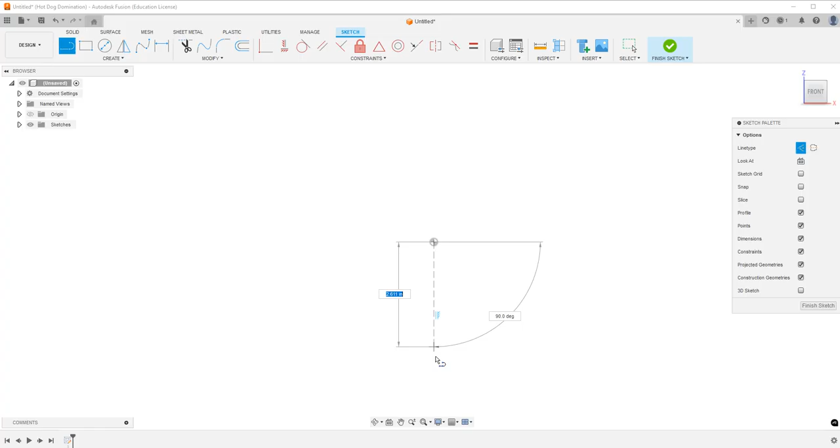First I'm going to hit the Line tool and select Construction Line, and go from the center down probably like 4 inches, because I think that's going to be the length of the bookmark that I want.

Then I'll hit the line tool again and deselect construction. I'm going to go out - let's see, how thick do we want this? 0.5, yeah, that should be fine.

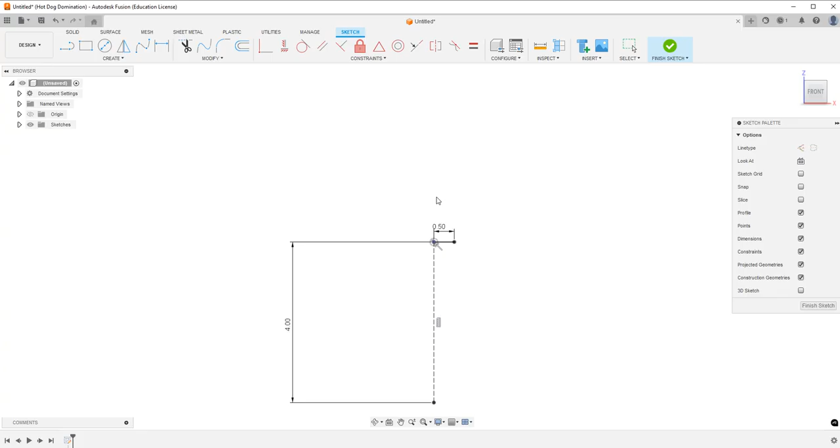Now we will go down to really anywhere, we'll just go 3.5 down, then hit this again and go all the way this way to the center. Now we don't need to do this - we'll go out 0.5, go down 3.5. We could have just as easily done this and then started and put all these dimensions in. So it really doesn't matter the way that you do it.

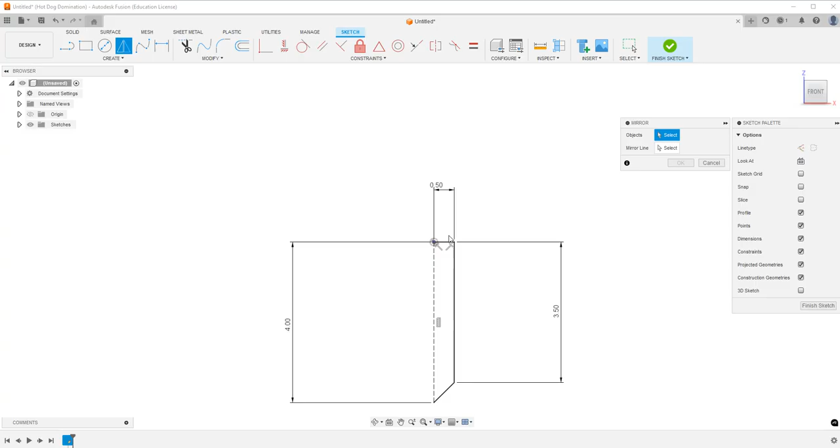Next, I'm going to mirror 1, 2, 3, and mirror it about this line. So now we get a closed sketch.

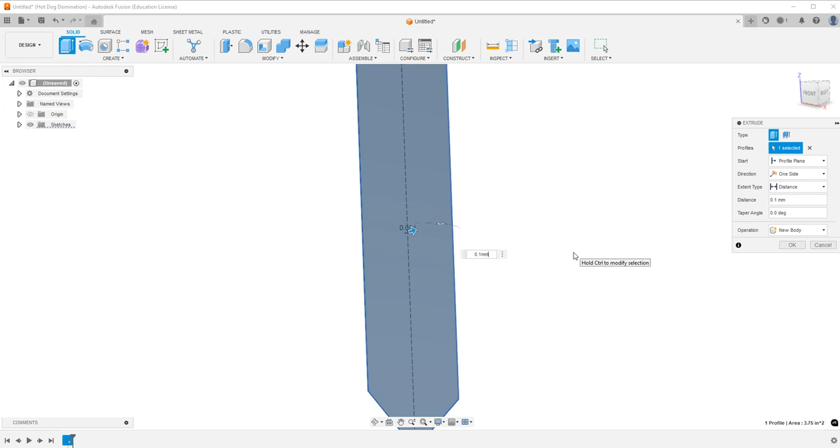At this point, we're going to hit solid, hit extrude, and the extrude direction is kind of important because I want to know which way it's going. We're going to extrude out 0.1 millimeters so that the software Fusion 360 calculates it itself - we don't need to calculate it ourselves. And there we go, it looks very thin, almost like it's as thin as a sheet of paper.

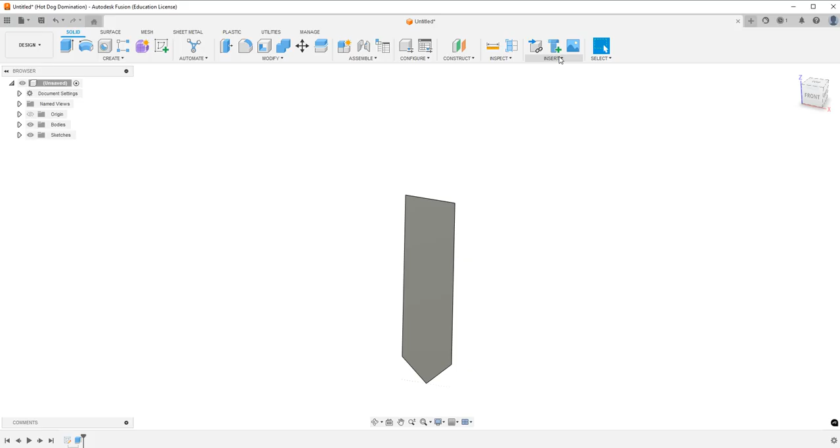Now next we're actually going to input our canvas from this helmet. We're going to go to the Insert tab and hit Canvas, insert from my computer. I'm just going to go to Desktop, and there's this helmet.jpg. I'm going to open that, and we're going to put it on the front plane, and there it is.

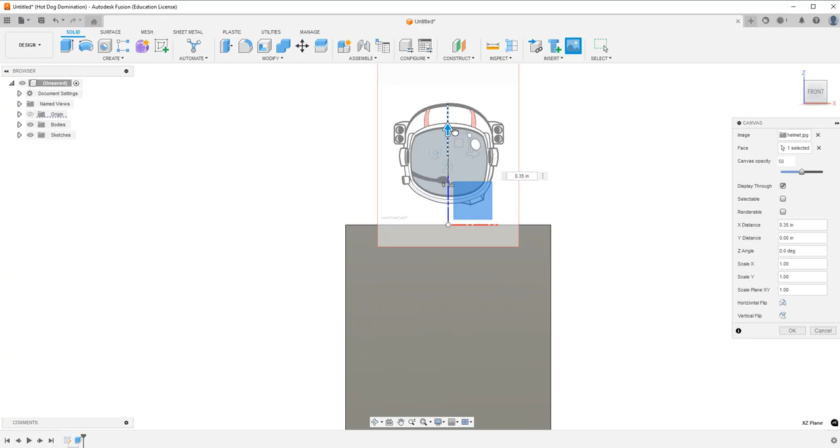First things first, we're going to move it up. There's going to be a little bit of a bar here that it's going to sit on, so we just need to keep that in mind. I'm going to make this just a little bit bigger, move it up.

Maybe 0.35 will be good. Yeah, that's good. So next thing we're going to do is we're going to create a sketch.

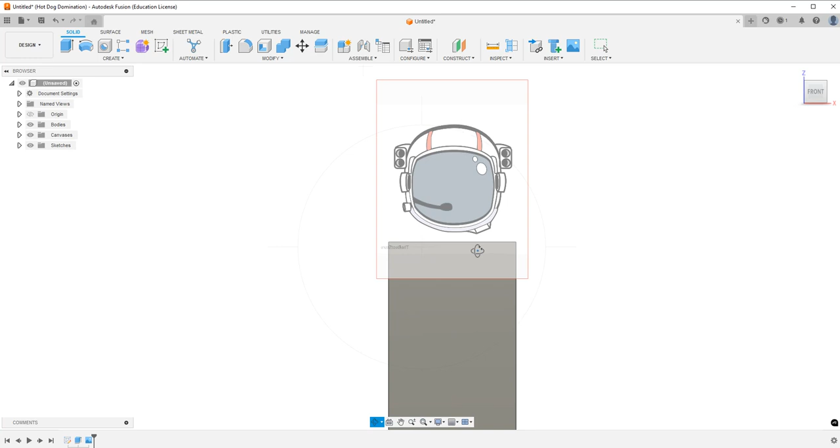The reason it's important where we add this is because when we extrude out this way, we can make the sketch on this front plane. If we extrude out the other way, it wouldn't make much of a difference—we could still extrude on this plane, but then we'd have to work off the opposite side and not this side. So just keep that in mind.

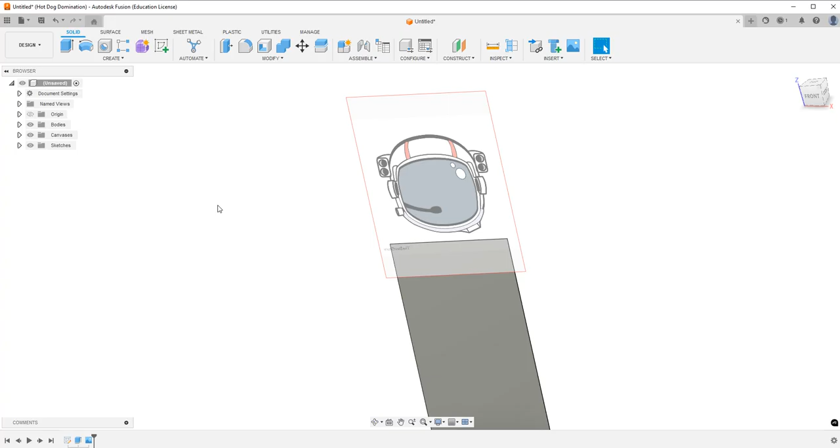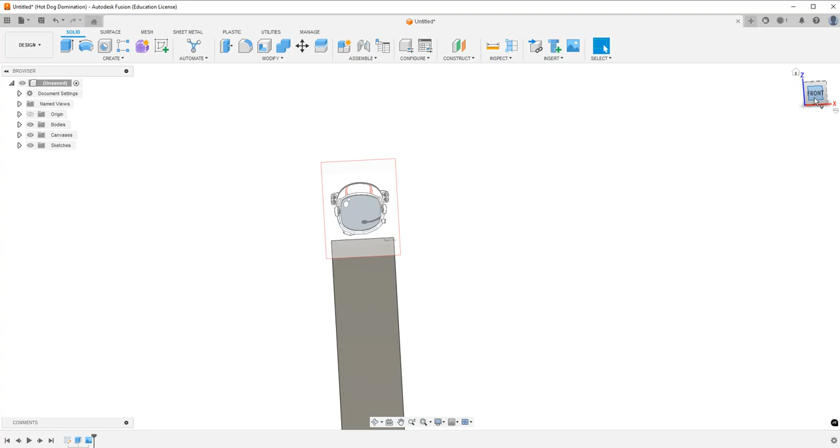Now, I just realized this is backwards actually. So we're going to hit this, and what we're going to do is mirror this—it's just this one right here, the horizontal flip. Realistically it didn't really matter, but in any case, tangent aside.

Now what we're going to do is hit Create Sketch, and we're going to do it on this front plane. First thing I personally want to do is hit Project Include and hit Project, and I want to project this top line, and you'll see why in a second.

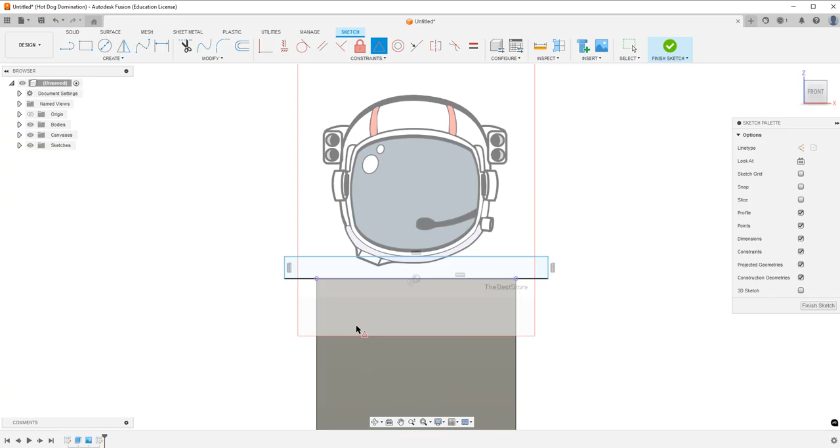The first thing is I'm going to create this 2-point rectangle all the way this way, and I'm going to create the midpoint from here to here. The reason I create this is because when this bookmark rests on the book, I want it to rest on a flat surface. I don't want it to rest on this point because that could actually indent into the pages, and we do not want that.

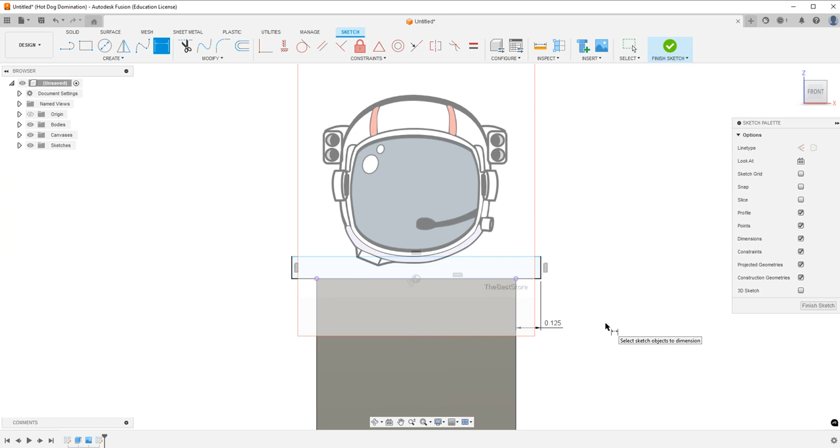Next I want to make this a little shallower, so we'll go 0.125. And then I actually like this height, so we'll leave it probably really close to what it is—0.11, you know, 0.115. I like even numbers.

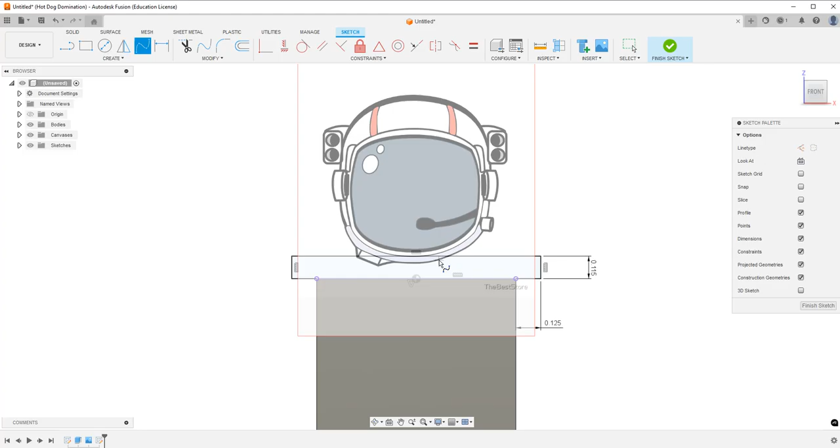It's my little OCD. But now what we're going to do is hit the fit point spline, and we're just going to follow all the contours of this. We'll start with the outside. I guess for this one we just need a line, so we'll go one line up here. And now we're going to go to the fit point spline, and we're just going to start following this contour.

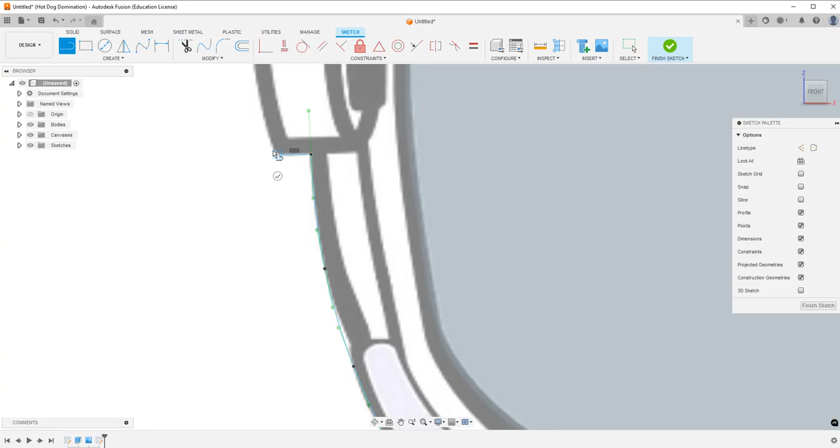I skipped over this little section here. It doesn't really need to be all that exact. It's nice to have things exact, but it's not necessary. With what we're doing, it just really isn't. At the end of the day, it's really not going to matter all that much.

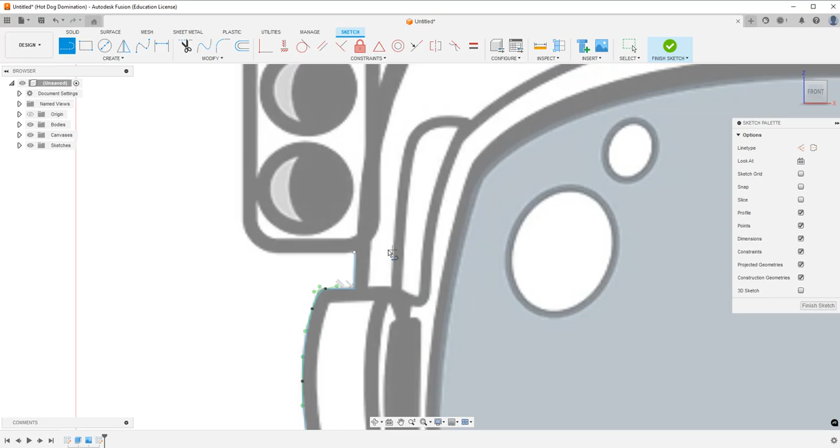So I'll just talk a little bit while I do this. Basically, the reason I really like this design—actually something interesting I'm going to do here—is I'm going to move out, and move up like this, and I'm actually just going to create a fillet right here. Yeah, it even gives me the exact dimension I need.

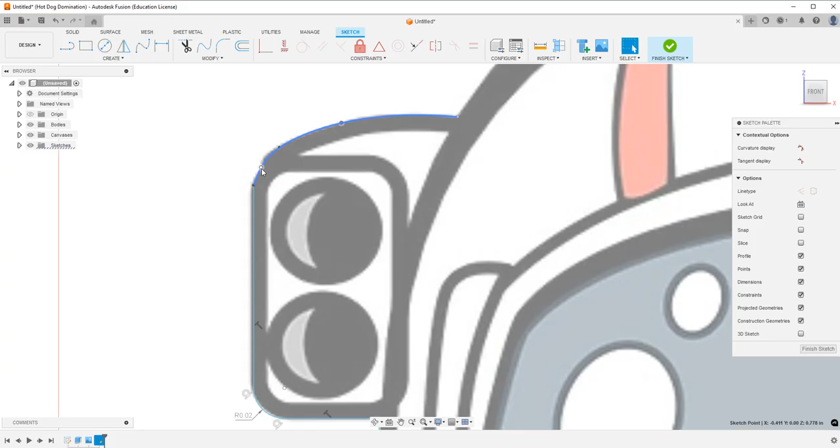But anyway, something that's really nice about this is that you can really tailor these to whatever you want. Like this is more for sci-fi books. I read a book a while ago, fantastic book, Six of Crows, where instead of an astronaut helmet, I just put a crow up here, and that was like my Six of Crows bookmark.

I have a buddy who really loves fantasy, so he asked me, 'Hey, could you do like a dagger?' And I'm like, 'Yeah, a dagger sounds cool.' So I just found clip art of a dagger, and I just put a dagger up here. So it's a lot of fun stuff that you can do with this.

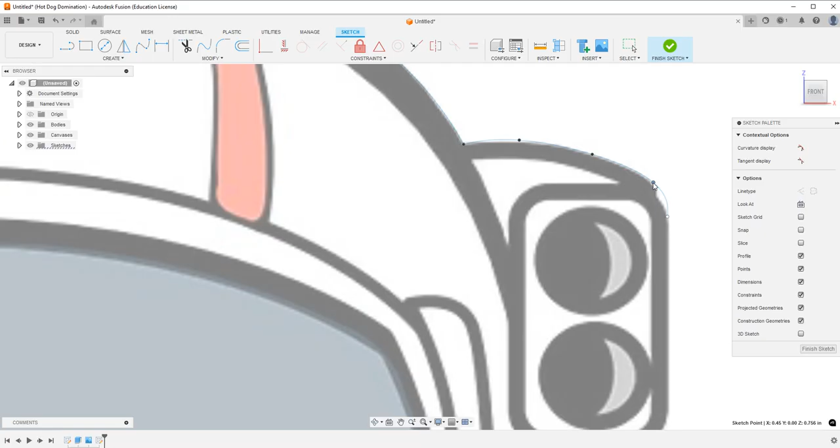I'll hit this here, so it's not really curving down. One thing you can do—you can do really two things here, and I'll show you that right now. So we'll go all the way down. Oh, yeah, that does happen.

We'll go all the way down. Oh, that must have been a spline, I apologize. Hit the line tool. This is really dependent on what you want to do at this point. You might not even follow these steps, but you really have two options.

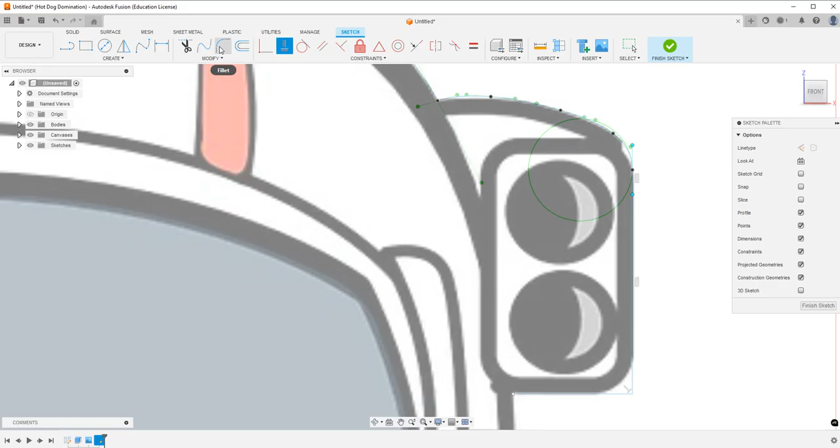You can do a tangent from here to here, or you can hit horizontal vertical and make this completely vertical, and that will also create a bit of tangency. So we'll create another fillet here. This one looks like it should be deeper, but it doesn't really need to be.

I apologize if I'm not coming out extremely concise, just because I am quite a bit tired. It's been a little bit of a long day.

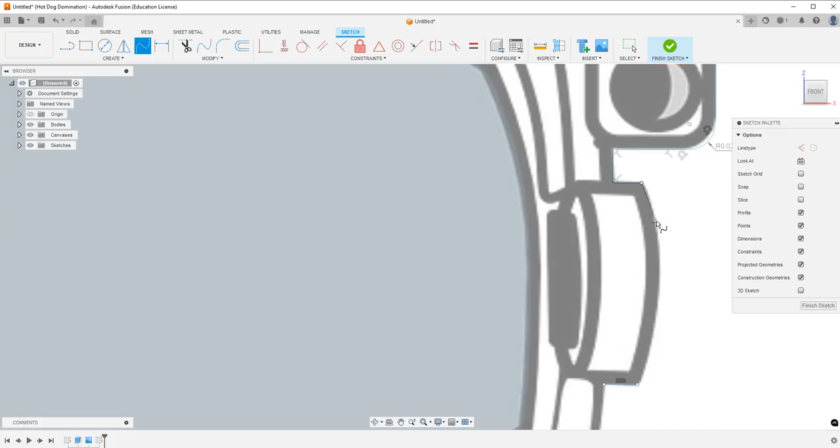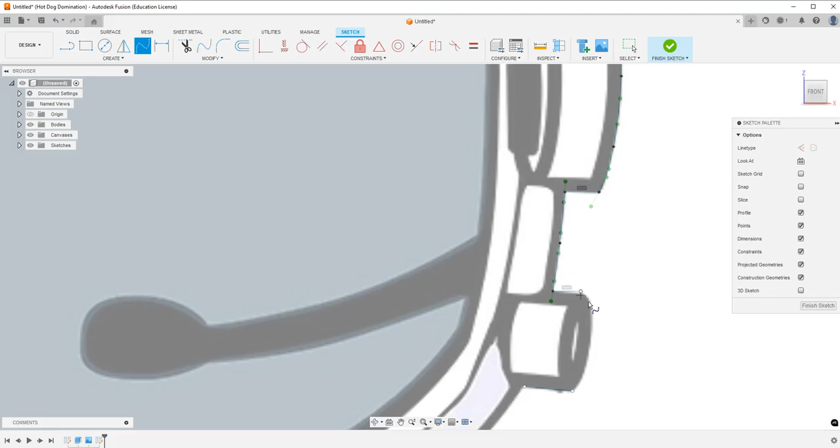Maybe it would have been nice to do something like streaming, which I am considering doing because I have kind of a bigger project in mind. I won't say much, but if I take it onto YouTube, maybe I can stream my design of it since I tried a little to start the design. It's not super complicated, just a lot of work. When I worked on it, I got a very rough outline, which probably took about half an hour, so I know getting the entire thing done will take a few hours at least.

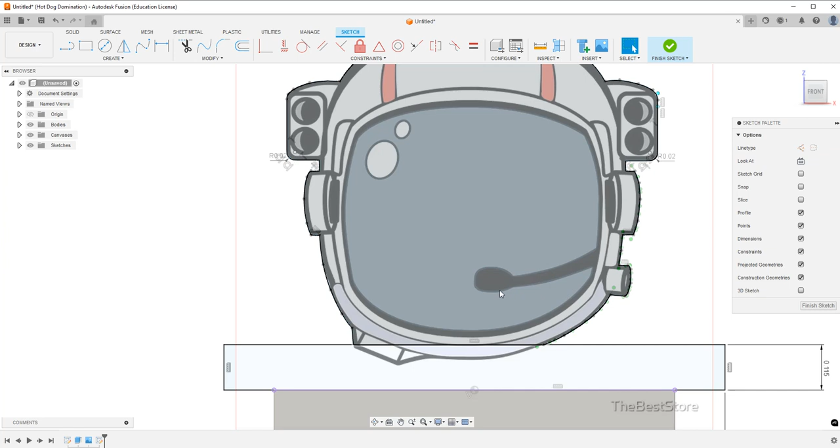So there we go, now we have a full outline, and the only other thing I want to do is just make this helmet here, and we'll think about adding the mic. We'll see what happens. But now we'll go to where the light part meets the dark part.

There we go, all the way here. And then we'll just keep following it. I'm going to go over the mic for now, and then I'm going to make the mic separate, and it'll be a good way for us to see if I like the mic or not.

This doesn't really have to be super exact. I was zooming in at other parts, but here, no, don't need to do that.

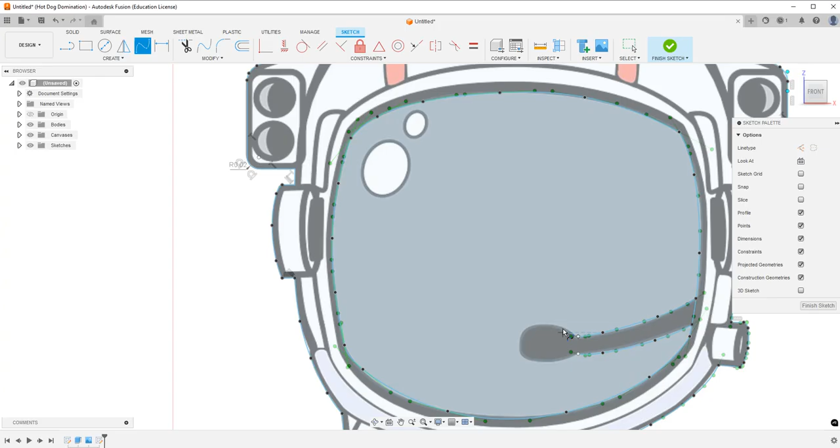The only annoying thing about this is that with all these dots, all these points, I want to go down here and they all just keep wanting to create some kind of constraint between them, which is annoying, but you can work around it. That's kind of the bad part about creating so many points.

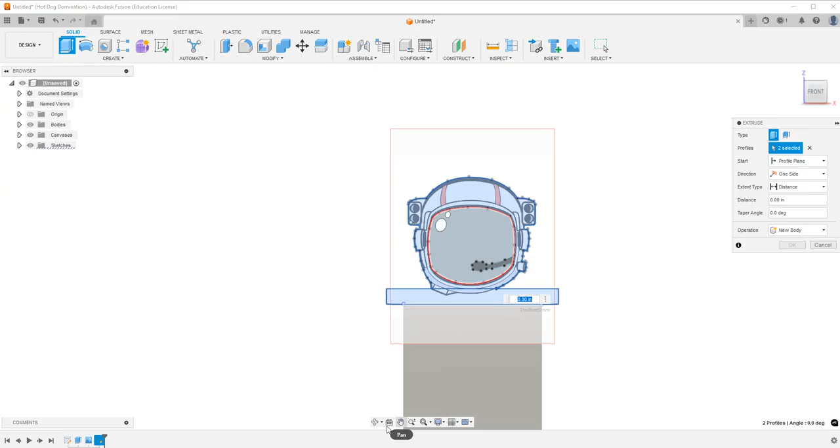Okay, so that is it. Now we will go back to solid and extrude, and we can extrude these two. I'm doing it right now without the mic, and we can make it about 0.125, about an eighth of an inch. We'll get rid of the canvas, and now we'll see what it looks like. I like that, that looks pretty cool.

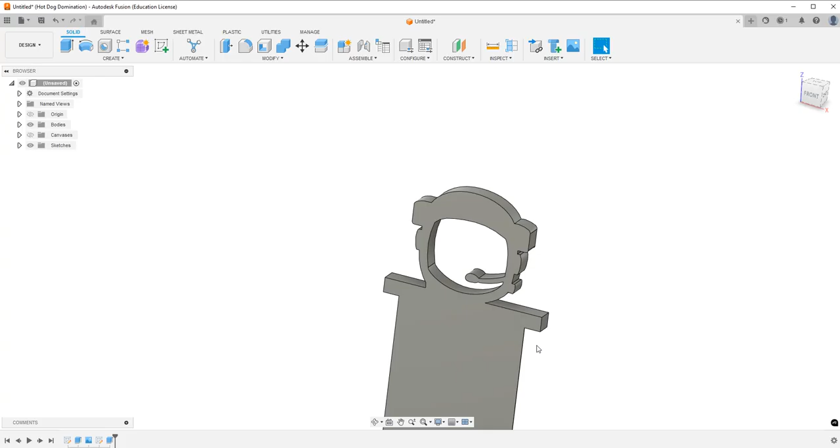Next we'll open the sketch back up, and we'll do it with the mic. And that looks a lot more like a space helmet. It doesn't really look like much of a space helmet right now, but that's because this is kind of a thick part and there are so many other designs. We could keep refining this more and more, but it's not really all that necessary.

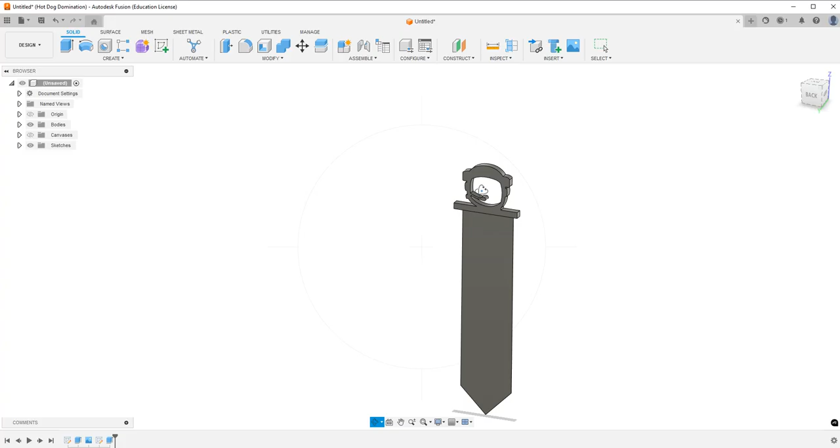So this is my take on the sci-fi helmet, which I still think looks pretty cool. Like I said in the video, you can do lots of little things with it. You can put a raven up here, a strawberry, I did a teacup, so it's extremely versatile for what you want to do. If you're into westerns, you can put a cowboy boot on here.

It's really whatever, but yeah, I just realized I haven't made a video in a while and I had a free evening, so I felt like, hey, why not just throw something together and upload a YouTube video?